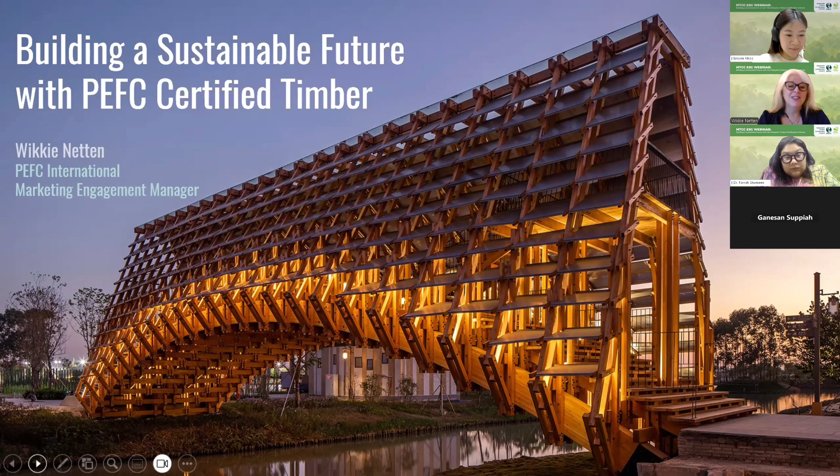Good morning, everyone. Selamat pagi. Thank you, Evelyn, for the kind introduction, and Dr. Farah, it's such a pleasure for me to be here with you today. A big thank you to my colleagues at MTCC, the wonderful organizers and my fellow speakers, and to all of you for taking time out of your busy schedule to join us. Over the next 20 minutes, I would love to take you on a little journey - a journey into how we can build a sustainable future together. That future starts at the forest, because forests and their ecosystems are the essential element for our future. Let's take a virtual tour together.

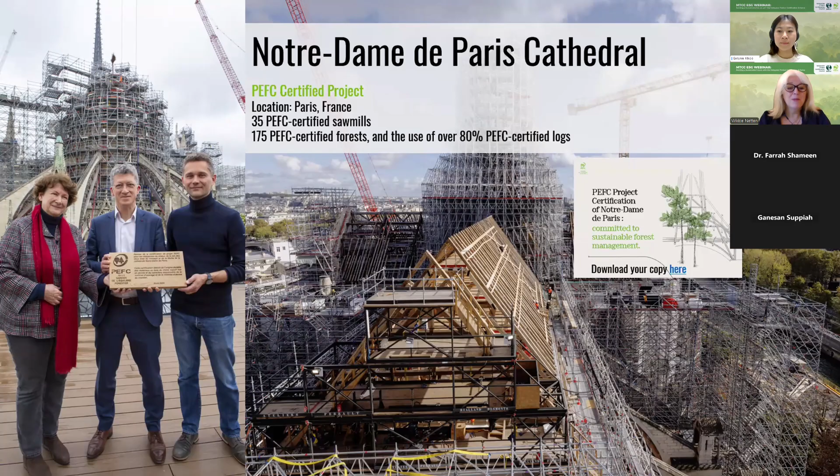The French company Chaisor went on to win the contract to supply PEFC certified wooden chairs. For Chaisor, it's unthinkable to use wood without the assurance that it comes from sustainably managed forest, and this unwavering commitment secured them the opportunity to supply 1,500 chairs for Notre Dame de Paris.

An example closer to home, we too are building a sustainable future with certified timber. A standout example is the academic building south of the Nanyang Technological University in Singapore. At the time of its completion, it was the largest mass timber building in Asia, spanning an impressive 42,000 square meters and incorporating 13,000 cubic meters of PEFC certified timber.

This project too achieved PEFC project certification, ensuring that every piece of timber was responsibly sourced. It's a shining example of how Singapore is embracing innovation and sustainable construction to reduce environmental impact while creating inspiring spaces for learning and collaboration.

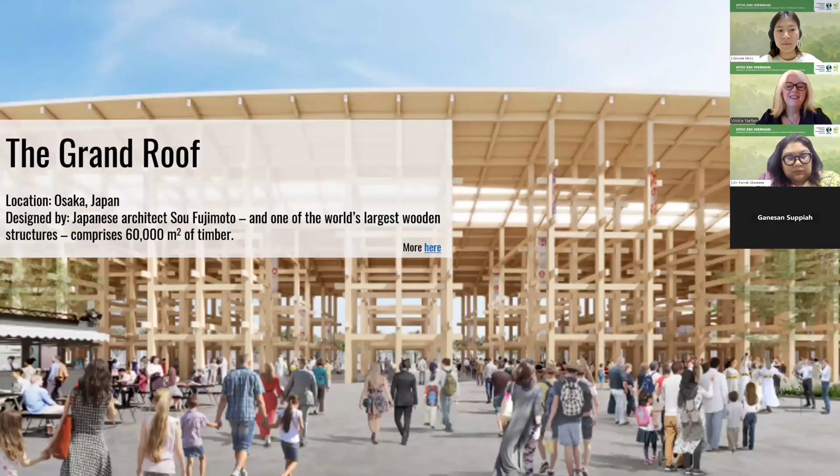But then came something even bigger. At the World Expo in Osaka, the world's largest wooden architectural structure was taking center stage. Recognized by the Guinness World Records, the Grand Roof, a circular wooden ring that houses national and thematic pavilions, demonstrates what is possible with wood.

The Grand Roof, designed by Japanese architect Sou Fujimoto, is one of the world's largest wooden structures and comprises 60,000 square meters of timber. It is built using 70% local Japanese cedar and 30% imported Scots pine. The project embodies circular design and climate-conscious construction.

Sustainability is at the heart of Expo 2025, and timber plays a starring role, not just because it's renewable, but because it enables modular construction, easy disassembly, and material reuse.

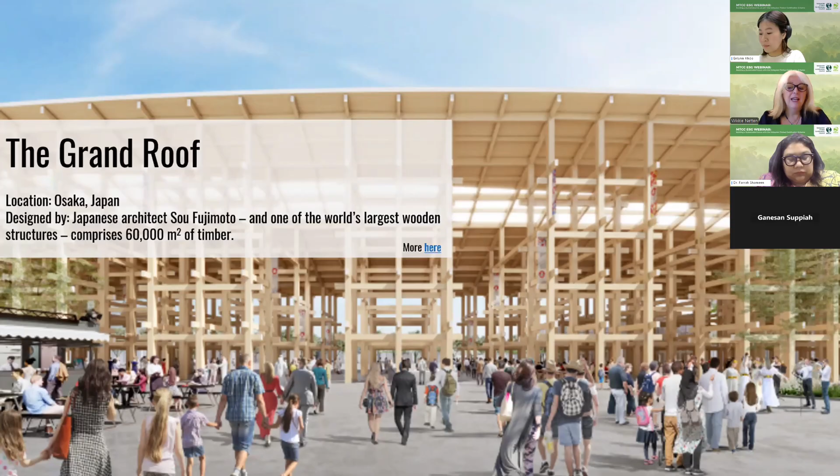Six national pavilions at Expo Osaka have chosen PEFC certified timber for the building of their pavilion, making a strong statement. These nations' commitments reflect a shared vision that sustainability isn't just about how we build, but what we build with and how we design for the future.

For structures meant to last just six months, timber offers unmatched speed, flexibility, and circularity. But when it's certified by PEFC, it carries a powerful message that environmental and social responsibility matters from forest to finished structure.

A powerful driver for sustainable construction today is the network of the Green Building Councils, or GBCs, around the world. The World Green Building Council catalyzes the uptake of sustainable and decarbonized built environments for everyone, everywhere. They work to deliver on the ambitions of the Paris Agreement and the United Nations Global Goals for Sustainable Development.

These councils are setting benchmarks for environmental responsibility in the construction sector and champion best practice to deliver on the 2030 decarbonization and sustainability goals for the construction sector.

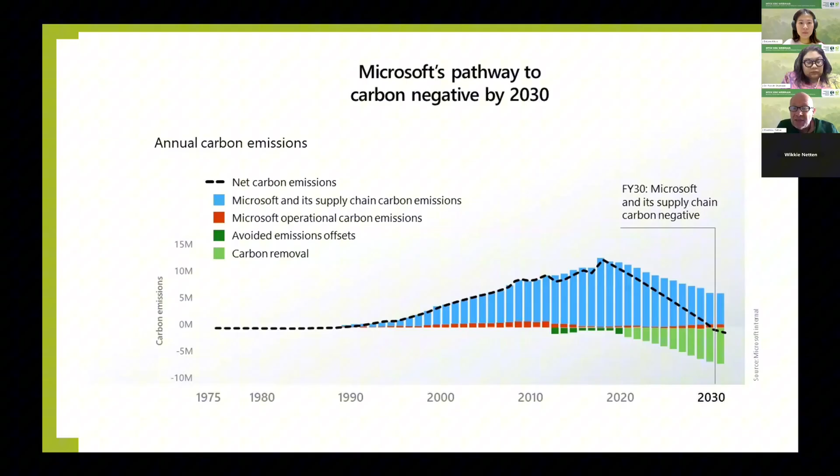This is just a little background on this: Scope 1 is your direct emissions, the fuel of the vehicles, tractors, or heavy equipment you're using in your plantation, the diesel genset in your sawmill or production plant. Scope 2 is the electricity that you're getting from TNB or other suppliers. And Scope 3 is everything else - the products you're buying, your outsourced transportation, even your products being used by your customers.

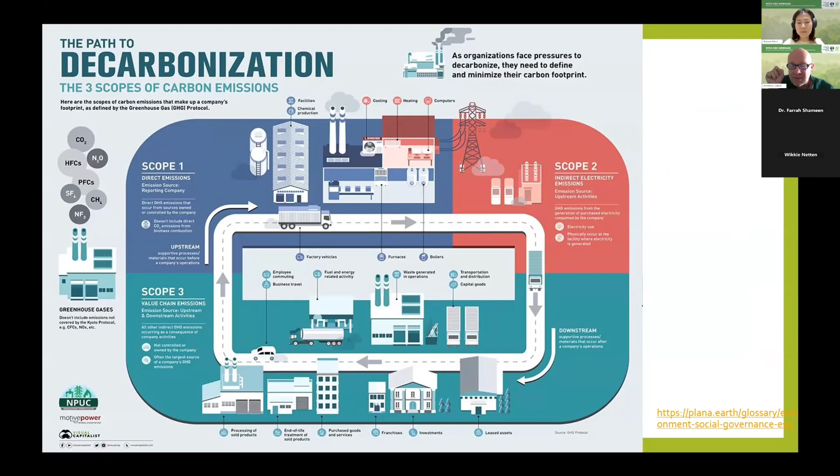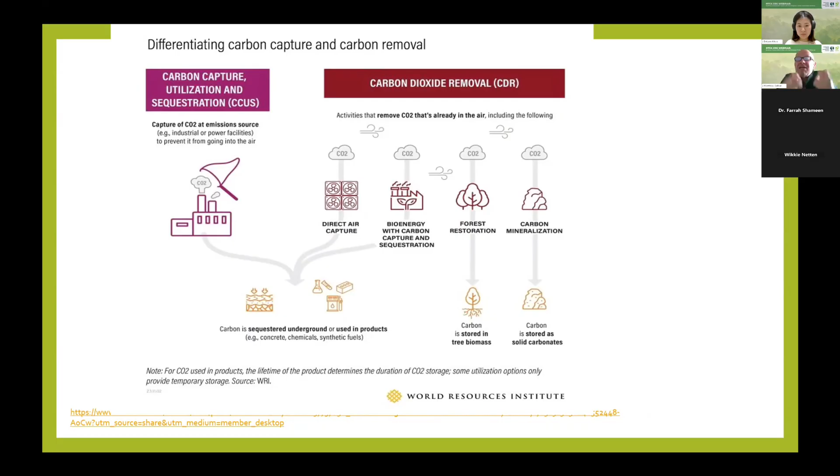And that is where we will have a gigantic business opportunity, because the carbon that is in your products is the big opportunity here. Now, carbon capture and removal - some people will do it with technology, but that's going to be very expensive. But if we do it through forest restoration, through reforestation, through plantation, we are storing the carbon in the tree as biomass. And if we then even mineralize that carbon, you might have heard of biochar. This is one of the big new mega trends here.

Now, a quiz question for you guys, and for all of those that answer this question somewhere close to reality: What is the carbon footprint of cement per ton of clinker? This is actually the big opportunity for anything made of forest-based, certified forest-based products. Can anyone here answer me that question in the chat box? If you answer close to correct, I will send you a copy of my book that I wrote 10 years ago in PDF form, The Green Man's Guide to Green Living and Working. And you will get a little goodie bag from Dr. Farah and Enlin sent to your place, or for pickup at MTCC next time you're in KL. What is the average carbon footprint of cement clinker per ton of cement? Anyone that can give it a shot and try to come up with the answer?

Okay, we have here Ariza, 6 to 8%. This is actually correct - cement is responsible for 6 to 8% of the world's CO2 emissions. And I think Richard here and Wong Kar Wei, yeah, I think you guys are now starting to ask ChatGPT, right? Yes, the global CO2 emissions is 8%, and the average CO2 emission per ton of cement - so maybe Enlin, you can have all of these people there get my booklet. And actually, the best correct answer that was given very fast was from Wong Kar Wei: 1 ton of cement clinker is about 0.8 tons of carbon dioxide equivalent.

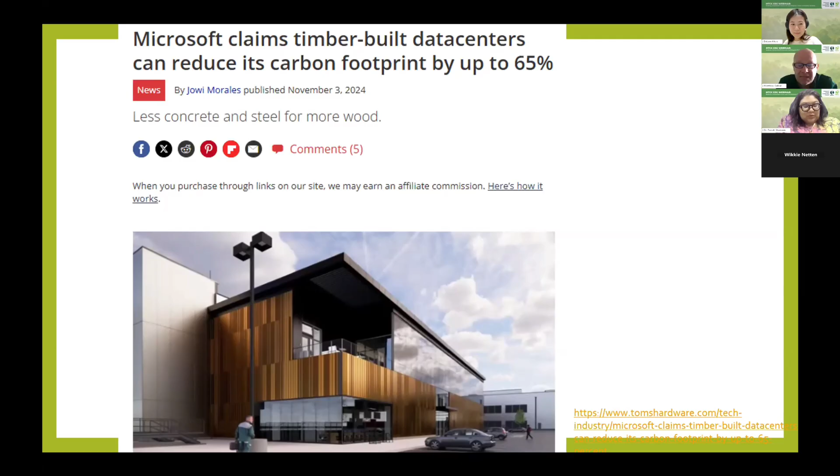And they are purchasing carbon removal credits from bio-based materials already, big time. This company here is from South America - you look at the video, they have forestry chain of custody and certification to the national standard in their country in South America. So they are using the MTCC equivalent framework to show the quality and the reliability and the credibility of the raw material that they are sourcing.

We can send you the video, but when you see that, you see this is exactly what MTCC and PEFC stand for, the credibility of your raw material. Even Google is buying into this type of carbon removal credits.

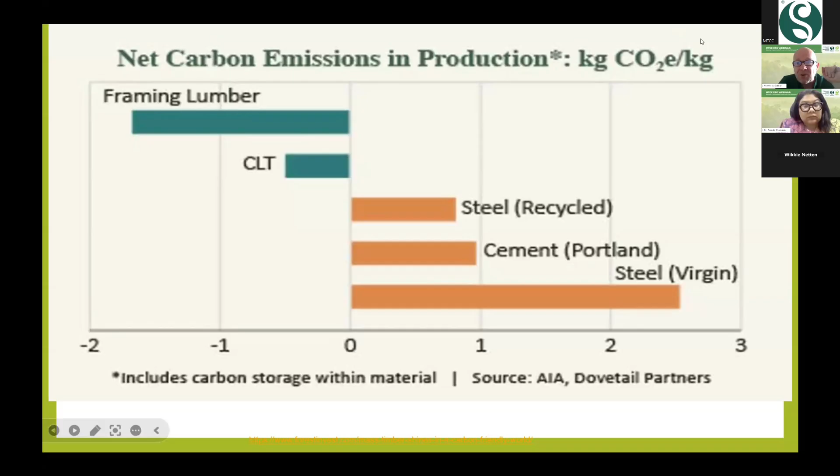Here are some environmental product declarations for sawn timber, finger jointed, CLT rib panels. You see, if you have structural sawn timber or finger joints, your carbon footprint is super low, negative global warming potential, because you don't have a lot of production carbon footprint. But here for CLT, GLT, you still have a kind of negative carbon footprint, so glulam as well, from the Rubner group down there. So this is the big opportunity.

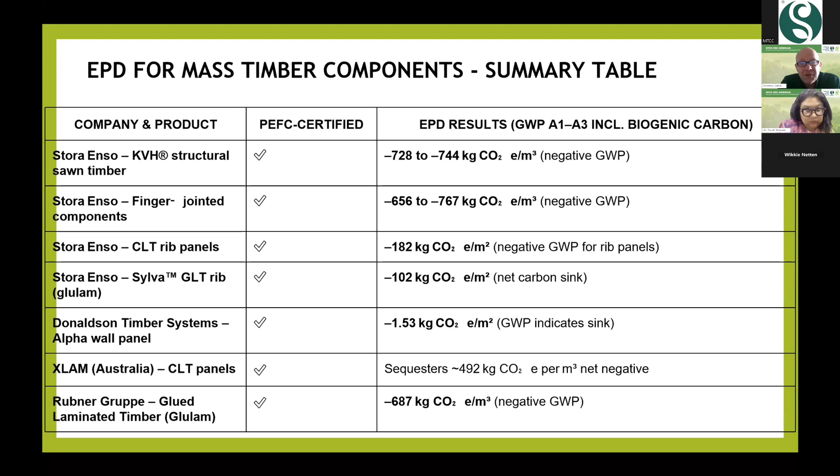That's the other beauty of some of these developments - they're even helping their packaging suppliers financially with investment into new machinery. And usually you get a longer term contract if you're focusing on decarbonization with your big customer.

Here's another example, Estrella Damm, a Spanish drinks company. They've switched to PEFC certified natural and renewable fiber, both to protect against reputational issues and to decarbonize their packaging even more.

So what can we do in terms of net zero in our industry? We can try to make our operations lower carbon. We can focus on climate positive land use - that's when we absorb more CO2 through our trees and biodiversity of land use. We can focus on circularity.

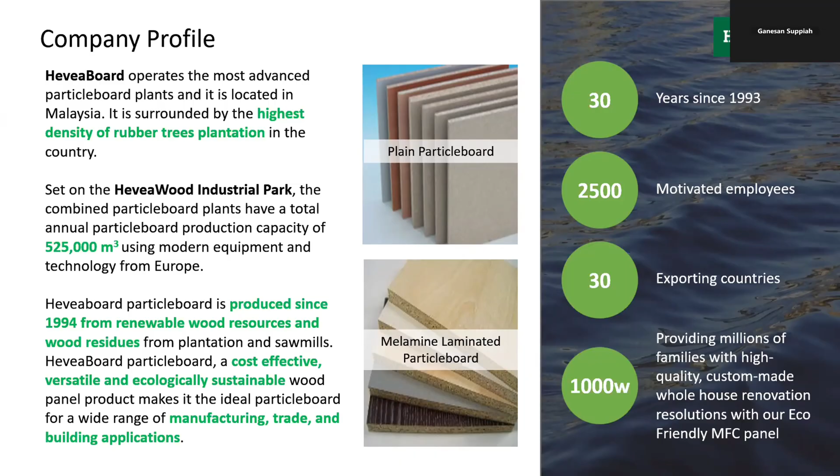Okay, next. From the onset, as we realized the supply of our raw materials was becoming more difficult to source, we decided we should look into other sustainability initiatives. As the Oxford Dictionary defines sustainability as the avoidance of the depletion of natural resources in order to maintain an ecological balance.

In line with that, we decided to start off by sourcing raw materials from sustainable forest and legal sources. So it made sense that we should work towards getting our PEFC certification. In 2012, we started working on our chain of custody, and in 2013, with support from MTIB and MTCC, we concluded the certification and obtained our certificate. This certificate helped reinforce HeveaBoard's sustainability commitments, as well as giving us commercial advantage by using the PEFC logo on products. It became the preferred choice of many of our responsible consumers, mainly overseas.

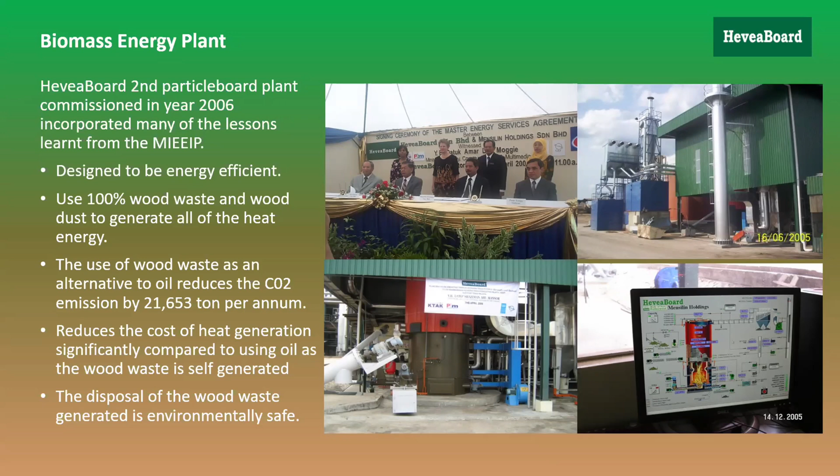Basically, with lessons learned from our first factory, built in 1994, in 2006 we extended our factory capacity to about 4 times the capacity of the first plant. We incorporated a lot of the technologies learned through these projects, converting our energy source for heating to 100% wood waste generated through the process, with no use of fossil fuels. This has given us savings of about 21,000 tons of carbon reduction. The cost of energy generation is tremendously reduced since we're using waste wood, and the cost of disposal of the wood waste generated has also been reduced.

Just some pictures of our energy plants, which we have in Gemas.

From MTCC, to generate 1 kilowatt hour of electricity releases about 0.774 kg of carbon in Peninsular Malaysia. In Sarawak, the figure is slightly less, mainly because the electricity is generated using hydropower. So in Peninsular, this is the figure.

The objective of having an organized system like ISO 50001 is that we have to develop a policy for more efficient use of energy. One of the objectives was that every year we should reduce our energy usage by about 2%. That's where we set our fixed targets to meet the policy. We receive data from various parts of the plant, which we use to analyze and decide the most efficient way to use energy. We have a continuous improvement program in place.

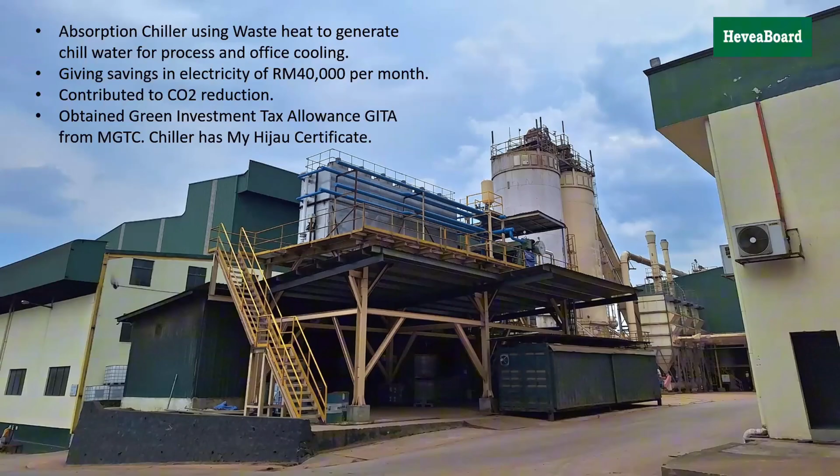Some of the projects, apart from reduction in electricity, there are also a lot of opportunities within our plant where we have a lot of waste heat being generated. This waste heat is being exhausted through our chimneys, and we decided to install what we call an absorption chiller. This absorption chiller recovers the waste heat from our stack and generates chilled water for process and office cooling. It has also given us a reduction in electricity, which directly contributed to the reduction of CO2 generation. This obtained a green investment tax allowance from the MGTC because the chiller has a My Hijau certificate.

We have also installed solar panels. This is our employees' car park that has got solar panels with about 447 kilowatt peak power. Solar generation contributes to the reduction of electricity generated using TNB electricity, thus there is a contribution in CO2 reduction. Next, we also have solar roof panels on our factory rooftop, giving us about 880 kilowatt.

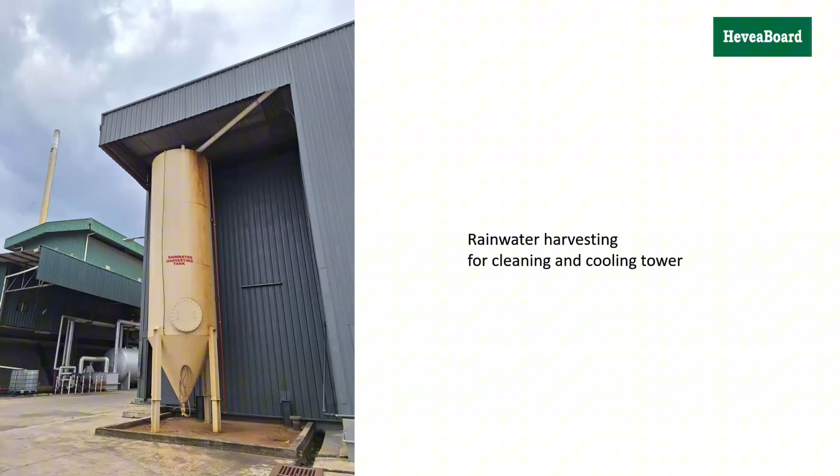Other sustainability measures that we are looking at is water management. Our process does require water management, and with the installation of the absorption chiller, some cooling water is necessary. So we have embarked on a system. This is just one example of how we harvest the rainwater, which is then used for our cooling towers. So practically, we do not consume any water from the local supply. We totally use water recovered from the rainwater. We also have some deep wells, some groundwater, which we are also in the process of working on.

Of course, all these things will not be successful if we don't have the raw materials to run the operations. So the biggest challenge which we have been facing over the last 10 years is the reduction of the raw material supply. We have found that the amount of wood currently available is starting to reduce. Furthermore, other new factories and industries have also set up nearby, so the competition for material has become intense. We have to be very innovative in how we obtain or maximize the wood available within this region. We have made a lot of massive advances in this area.

I'll share with you a few examples of what we have done.

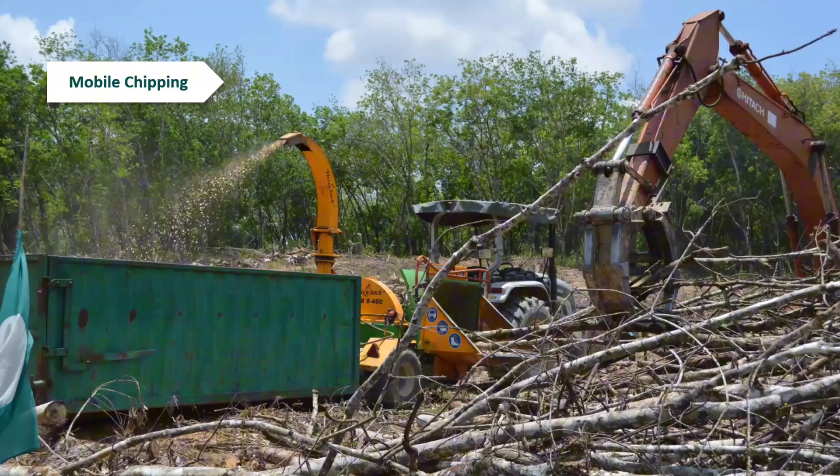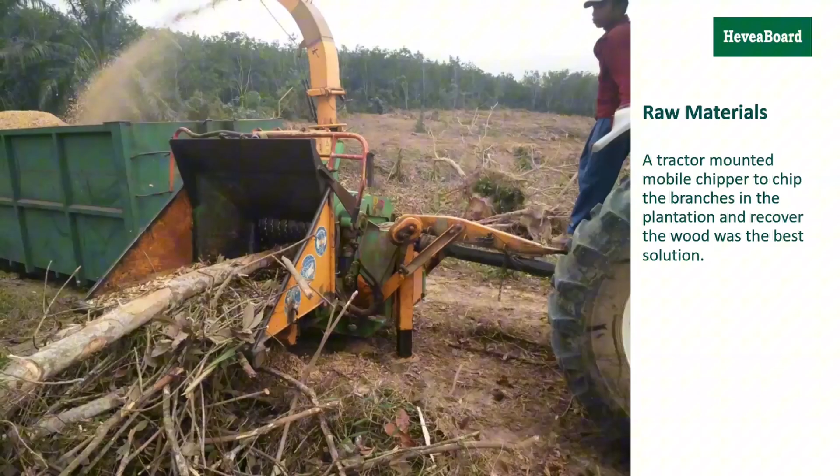Here, what you see is what we call mobile chipping. These small branches which you see are normally left in the field and not usable by anybody, so the most common method of disposal has been open burning. Through this mobile chipping, we are able to chip the materials, the small branches, into a ro-ro truck, which is then transported to our factory.

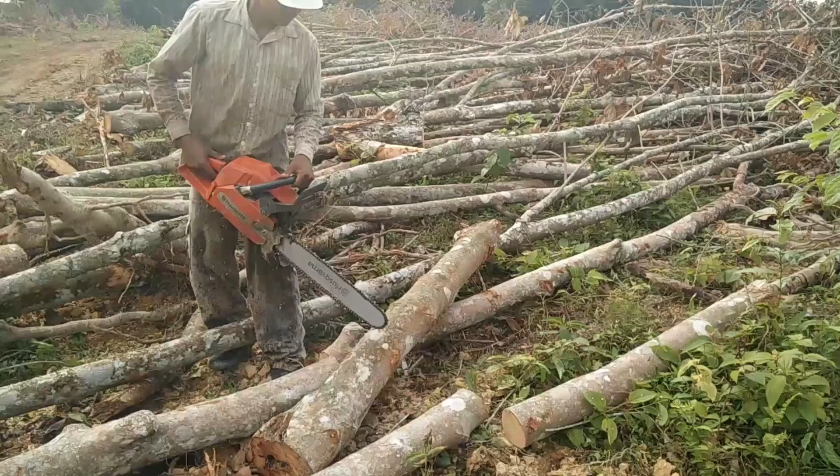Here we have a video. I'll show you a video of what we are doing.

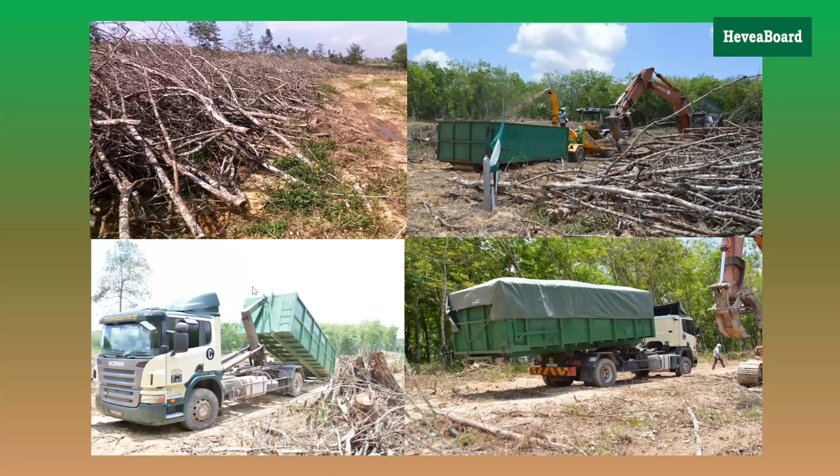So we are able to recover all this material, these small branches, that otherwise would have been left to burn in the field.

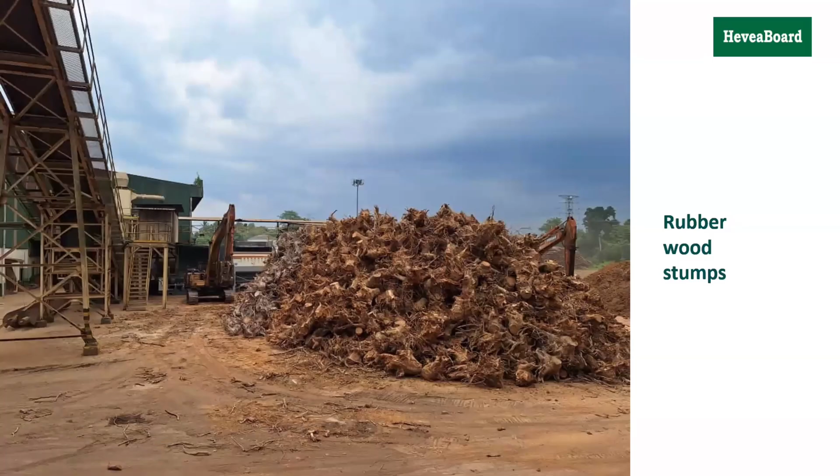Another source of material which is also left in the wood and very difficult to process is the wood stumps, basically the roots. This is a real challenge to process, because the roots are very difficult, they entangle in the machines, and they contain a lot of sand and stones. However, it is a very good source of material that is being left to waste, so we use this material.

We'll show you a video of how we are able to process this material.

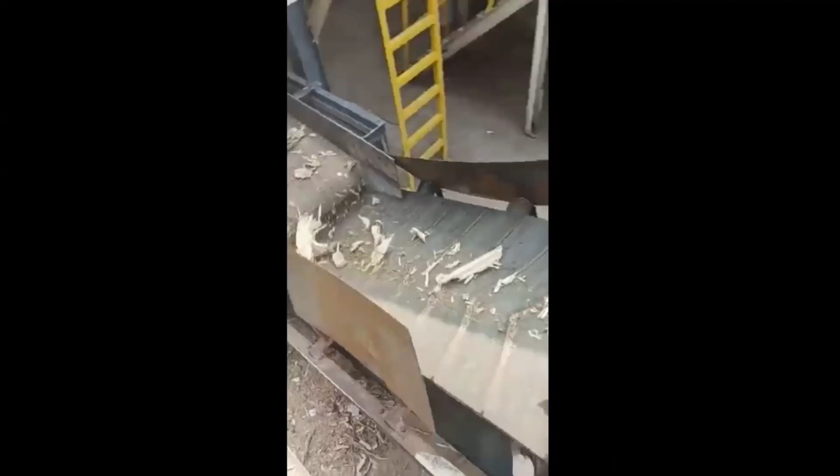I hope the video was clear. So what you can see is, previously, in a typical plantation, the most amount of wood we can recover is about 70%. The other 30%, which is the stumps as well as small branches, is normally left behind in the plantation through other means of disposal. With our system, we are able to increase recovery by another 20%. What is left behind is mostly small branches and leaves which act as compost. The plantation is cleared very fast and ready for replanting. We do not leave any waste behind for disposal, no pollution or damage to air quality, no distress to animals or wildlife. There's also additional income for plantation owners or smallholders who are able to sell this waste wood to companies like HeveaBoard.

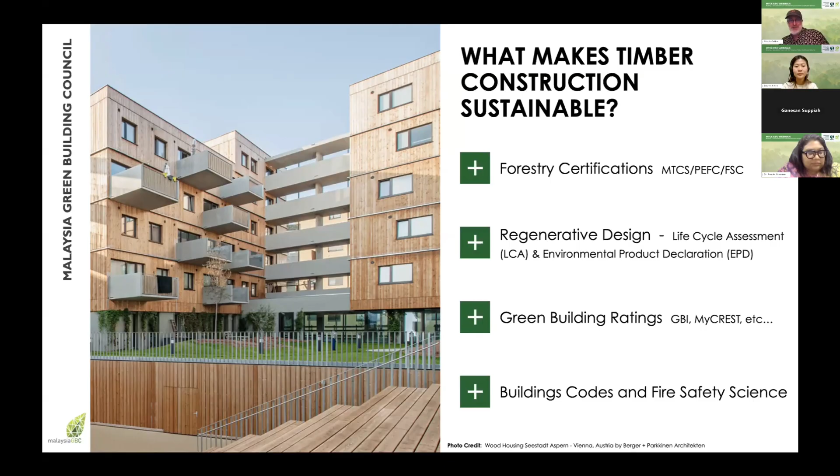So Matthias touched on timber as a carbon mitigating construction material. The Malaysia Green Building Council has an annual assessment for carbon emissions from buildings in Malaysia called Carbon Score. And so I'm going to use the Carbon Score framework to expand a little bit on what Matthias spoke about earlier about timber as a low carbon construction material.

So the CarbonScore framework provides an annual assessment of what are the carbon emissions for a building for one year. The framework looks at both operational and embodied CO2.

The CarbonScore assessment looks at this 80% from energy. It also looks at embodied carbon from the construction material, the original construction materials, as well as incremental operational emissions from water and waste. Typically for the average Malaysian building, about 1 to 2% at most of our carbon emissions come from water used by the building and waste generated from the building.

So the overwhelming majority of life cycle emissions from buildings in Malaysia come from operational energy use and the carbon emissions embodied in the original construction for that building. And that tallies more or less with global examples. In countries that have cleaner grids, Denmark for example, their electricity generation is about 6 times cleaner than Malaysia's. China's is about 40% cleaner than Malaysia's. Indonesia and some of our regional partners, Singapore, Malaysia, Indonesia, our grid emissions factor is all about equivalent.

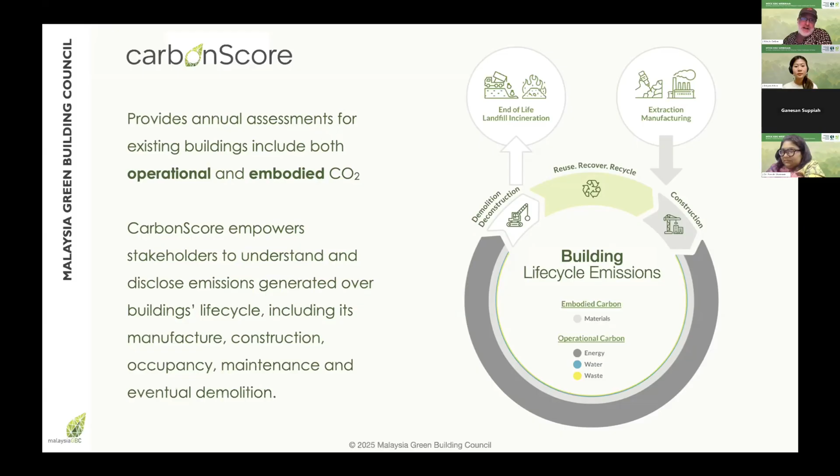Timber only has a 0 carbon or negative carbon factor on construction if it's harvested from a managed forest. Timber that's taken from a primary forest, and especially in Malaysia this is true, is a net emitter of carbon, and a substantial one, because our Malaysian forests themselves have carbon sequestration. So timber that's harvested unsustainably is a very, very powerful emitter of CO2. It's only when timber products are extracted from managed forestry that we enjoy the benefits of timber as a 0 carbon or negative carbon material.

So I mentioned earlier green building certification. This is one case study of a building, the Sarawak Museum in Kuching, that's achieved credit towards its GBI certification. This project used more than 92% of the total wood-based materials in the building certified under MTCS.

And this is true not just of GBI, but of all green building ratings, both within Malaysia and internationally, that the use of certified timber is recognized as contributing to the green building certification. This is a really powerful tool in terms of awareness for sustainable construction, and for timber specifically.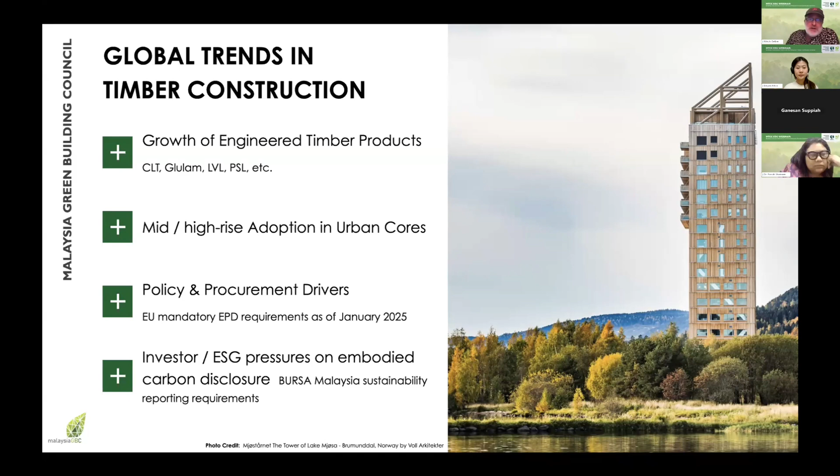So Matthias touched on EPDs before. How timber can leverage this is that an environmental product declaration is a public disclosure of the environmental impact of a construction material.

Think of it like when you go to the supermarket, you have the nutrient label that shows you exactly what's in the food product you're purchasing - the fat content, sodium, sugars, etc. What an EPD is, is a health label for the public, for your construction material or any product whatsoever. On the bottom left of the screen we have an example - this is a concrete product. This is the environmental impact of 1 meter cube of concrete that is affixed to that concrete and gives public disclosure for the purchaser of what the environmental impact of that material is.

So the graph on the right is the uptake of EPDs globally, and you'll notice that this progression is not linear - it's exponential. This chart ends in 2022. As of 2024, we have upwards of 40,000 EPDs globally for construction materials. So year on year, the number of EPDs in the market is doubling, increasing exponentially.

So we'll quickly take a look at a few case studies in a little more detail. I studied architecture in Vancouver, British Columbia. British Columbia has a massive softwood timber industry - it's the second biggest economic driver of their province in Canada. This is an 18-story student residence at the University of British Columbia. When it was completed, it was the tallest hybrid mass timber building in the world. It's proof of concept that mass timber construction can be safe, fast, and cost competitive.

Matthias mentioned before the efficiencies of working with modular timber construction. This building's superstructure was completed in just over 2 months by a construction crew of just 9 people. It shows - and we'll see the next presentation about the Lego construction - the speed, the efficiency, the modularity, the lightweight aspect of timber all contributes to lower cost. Concrete is not only a high-emitting material, it's a heavy material. It requires extensive costs for transportation, fabrication, and huge amounts of energy in the manufacturing process. Timber competes already in 2025, one-to-one in terms of cost, for mass structural systems and construction.

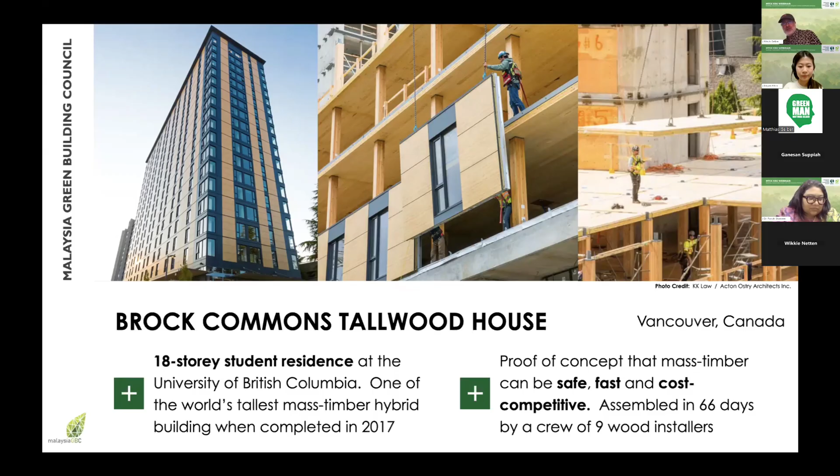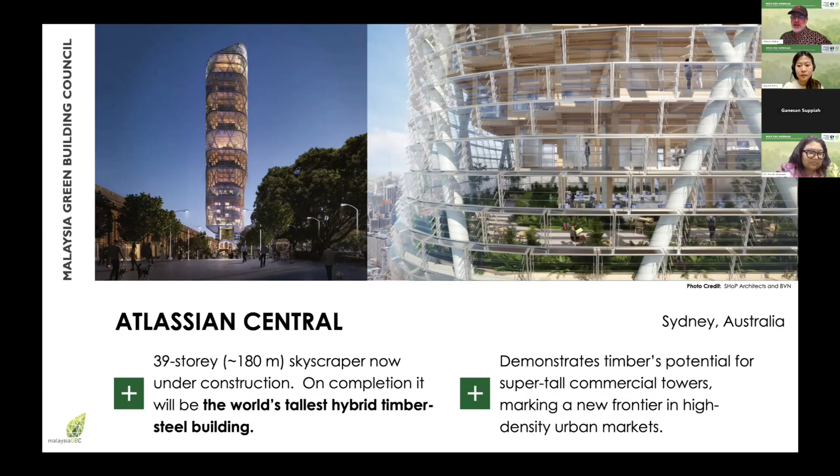Another example from Sydney is the Atlassian Central, near their Sydney Central Rail Station. It's a 39-story commercial skyscraper scheduled to be completed later this year, and on completion it'll be the world's tallest hybrid timber-steel building. It demonstrates timber's potential for super tall commercial buildings. This building has a steel exoskeleton around the outside, and you can see from the rendering on the top right, the core, the floor slabs, the partitions, and the internal structure are all mass timber construction.

The last case study is Port Plus in Yokohama, Japan - an 11-story mixed-use, full mass timber structure. When it was built in 2022, it was the tallest full mass timber structure in the world, using prefabricated cross-laminated timber panels and glulam structure. The reason I showed this one is not only because of its beauty, but it shows timber's viability as a structural system in a really complicated seismic and coastal context. Yokohama is right on the ocean, sits along the Ring of Fire, and is prone to earthquakes and seismic construction.

So this building relates to what we mentioned before about fire requirements and some misconceptions. I'll circle back using this building as a case study. There's a real misperception when it comes to mass timber and fire, because people think of wood as being combustible. When we look at fire code - and this is true not only for Malaysian standards but fire codes around the world - buildings have a fire rating measured in hours: 1 hour rated, 2 hour rated, 4 hour rated. These fire ratings indicate how long the building will remain standing if a fire breaks out - how long the material will take before the fire compromises its structural integrity.

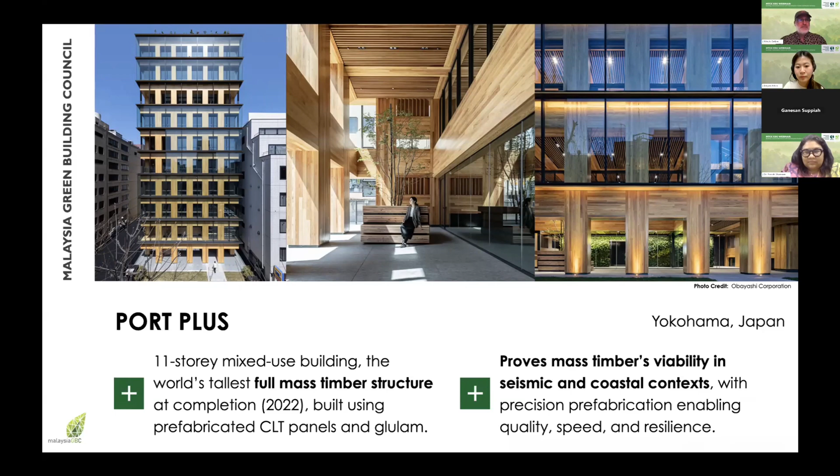So I'll move quickly for the sake of time. What are some key design considerations for use of mass timber in the tropics? I already talked about fire. Acoustics is another one, because we're used to working with concrete, and timber has different acoustic properties. So the acoustic performance of the building needs to be accounted for when working with timber structure.

There was a question in the chat earlier about termites. Mass timber is an industrial product, controlled at a factory output. So termites can be handled through processes, filtration, etc., just like steel and just like concrete. Timber is optimized at the factory to deal with these environmental challenges.

In addition, we talked about the importance of certification. This is especially true in Malaysia, to be legally sourced and sustainably managed. The environmental impact from timber is only gained with sustainably managed forests.

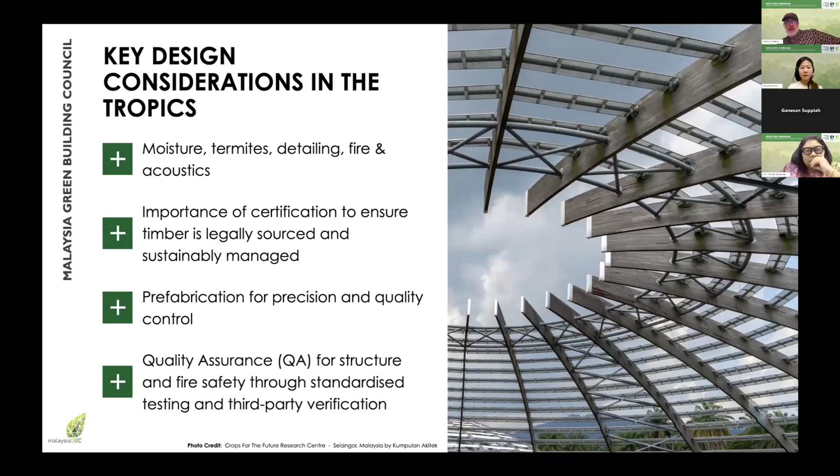And then finally, looking at procurement, which is critical. Government endorsement, architects, engineers need to be equipped with the skill to adopt this design.

And finally, market development solutions. Increasingly in Malaysia, we're seeing the adoption of green financing, green bonds, and mass timber is a very elegant, straight line towards preferable loans for construction and green financing.

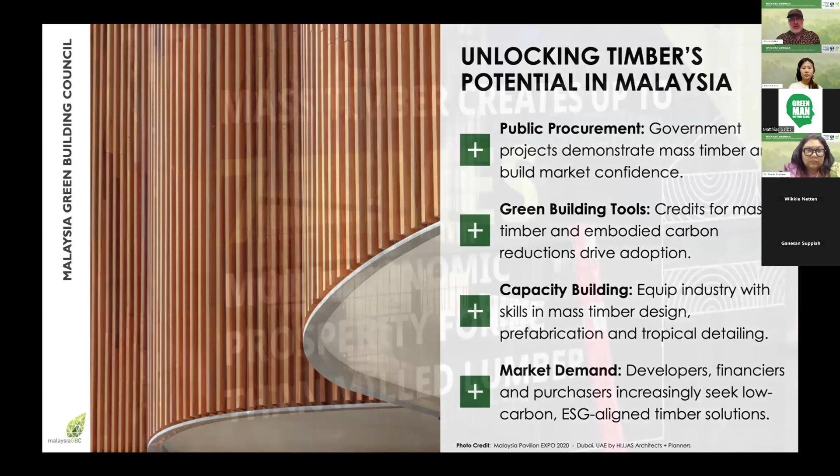So we'll end with this: I just came back from a trip to Vancouver a few months ago. These photos are a little hard to read, but these are images I took from construction hoarding at a 12-story timber building going up across the street from where I was staying. Mass timber creates up to 7 times more value than milled lumber.

This is because, first and foremost, mass timber is a value-add product. It adds value along the value chain, not just in the end building, but through the manufacturing process. It takes a raw material and adds value so it can substitute out much more expensive and costly steel and concrete construction.

And the building going up across the street—BC forest regrew the wood that made the building in less than 60 minutes. This was a 12-story building with 200 residential apartments, and the forestry regenerated that raw material in less than an hour.

So the key takeaways: mass timber is proven and scalable worldwide as a low carbon building solution. Certification and environmental disclosures are key drivers to ensure compliance in international markets. And Malaysia has a tremendous opportunity to catalyze growth.

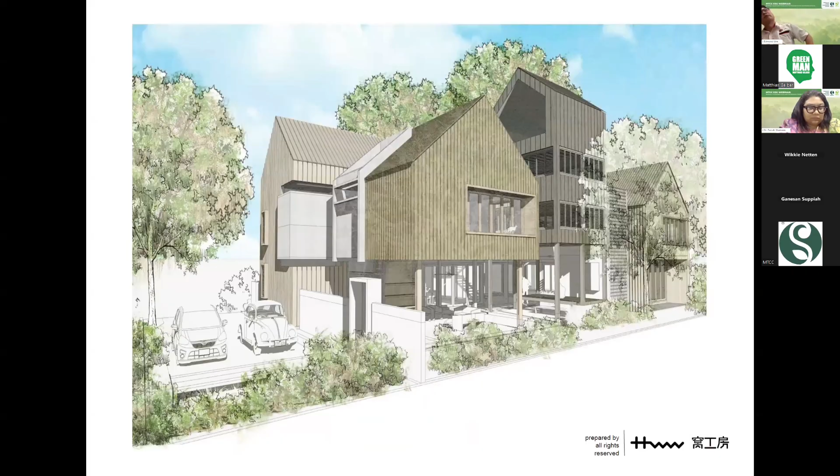The site is located nearby a former tin mine lake, so we have a natural environment here with a water body not far away.

The planning of the house is such that we try to create a very open space at the ground floor. We have all the common and semi-public areas located at the ground floor, and all the bedrooms at the first floor. This enables us to plan the house in a more naturally ventilated manner, while the bedrooms have more privacy and more enclosed walls.

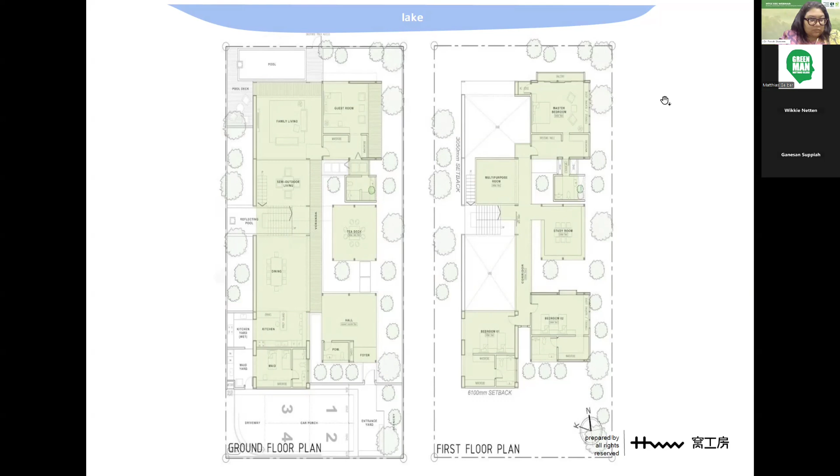So a quick diagram of the house shows how we place the elongated house with open area at the ground floor and more enclosed rooms at the first floor.

The lake is at the back or front of the house, depending on how you see it, and we actually draw cool air from the lake. So having a lower ground that is open air is very essential.

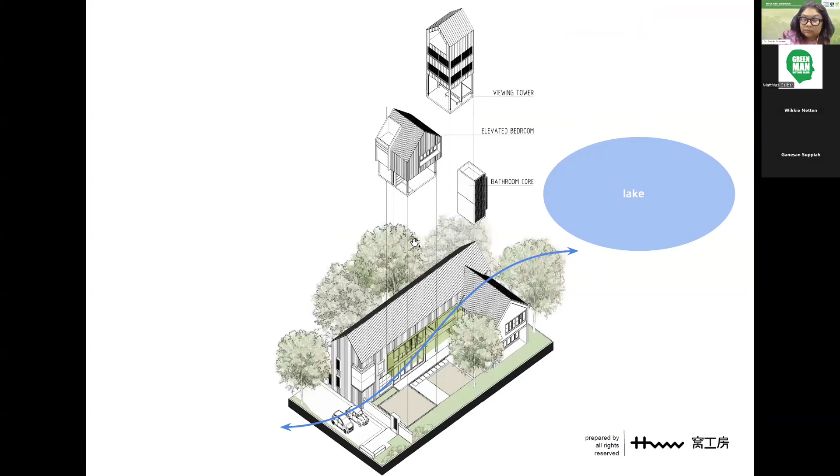These are cut-out sections of the house showing how we apply double volume spaces within important areas such as the living hall and dining hall, and also how we use the staircase.

The house is in various clusters. The use of clustering is important, where we can plan micro public spaces within the neighborhood, growing up in Terengganu, which is a very village setting. So that makes our design rather easy and casual, which I will explain through some of the photos later.

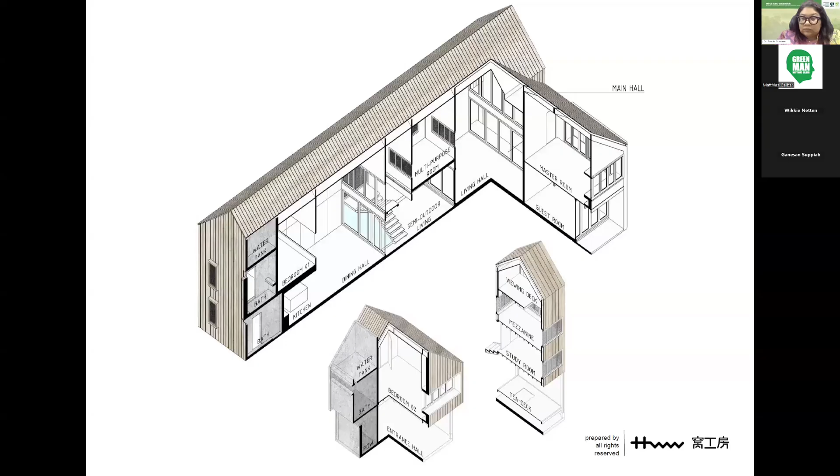This is a diagram of how the glulam timber structure is incorporated with some minor concrete cores. We use concrete core as an anchoring structure to strengthen the timber structure, and at the same time it's used for all the wet areas such as toilet, WC, bathroom, and water tank areas. So the use of concrete is in a very controlled manner, where you can see most of it consists of glulam timber.

So these are some general details for the glulam structures.

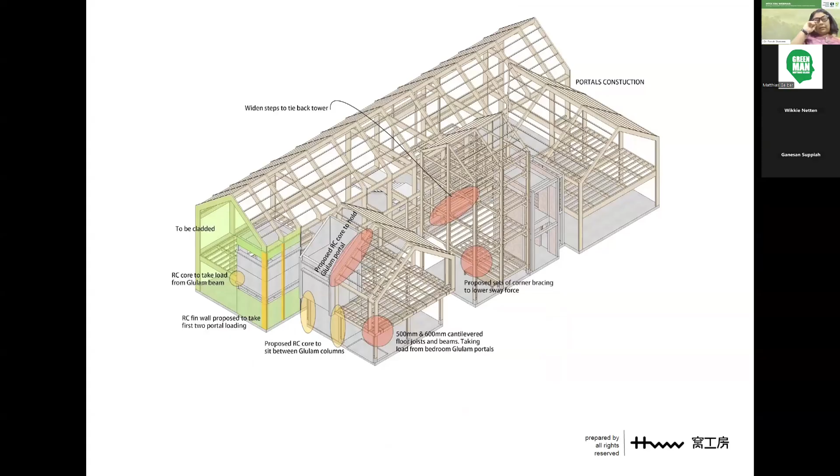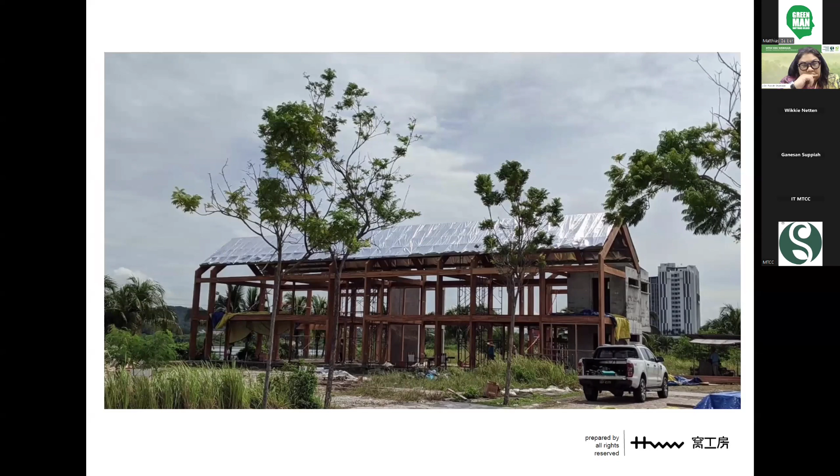I will also quickly show some photos during the assembly. Maybe Edmund, you can share with us how long it takes to assemble the main glulam structure? For this row of structure, we have 9 portals. It took about 2 days on site for us to connect them together, and once we have all the connections done, I think it takes about 3 to 4 days to complete.

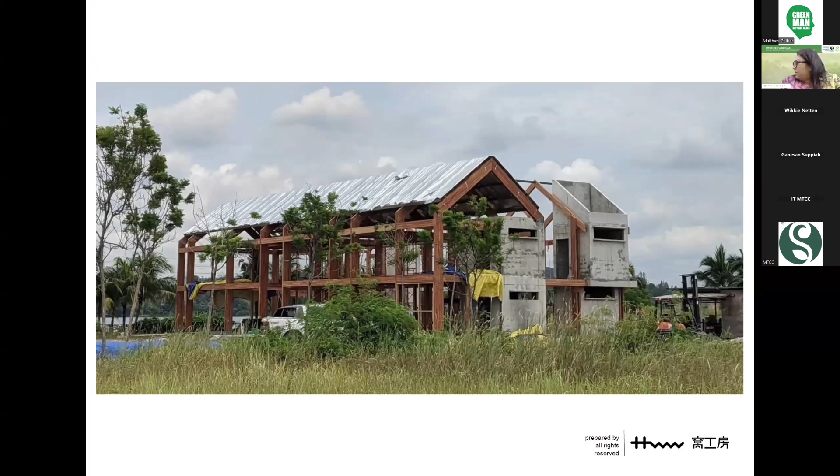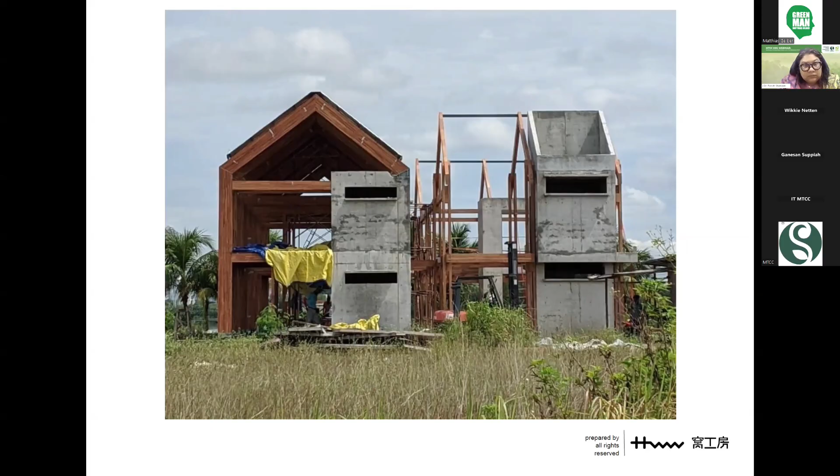The first, the big building on the left side - and for other smaller ones, it takes about 2 to 3 days. So it's a very simple IBS way, very Lego-like design. Everything can be done on site within a few days if you get it planned properly.

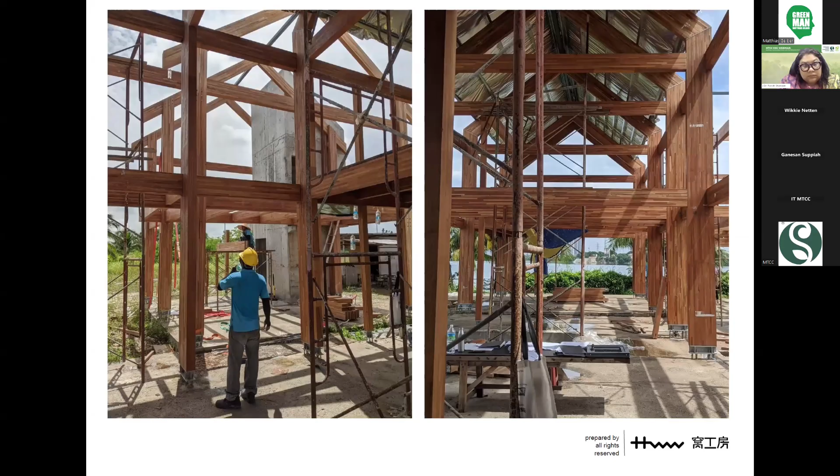As you can see, some with double column, some with single column. We try to come up with different designs and get a feel of it. So far we are quite confident that timber can be used as a structure, and it can replace steel structure as well.

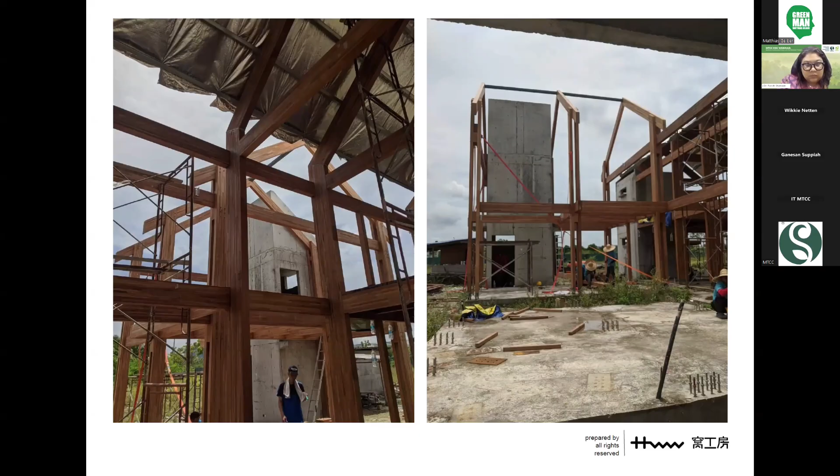And these are some of the hidden joints that we use. As you can see, the steel plates are mostly hidden inside the wood, and at the base we kind of expose it so we can at least see whether there's any termite attack, and it's easier for us to maintain in the future.

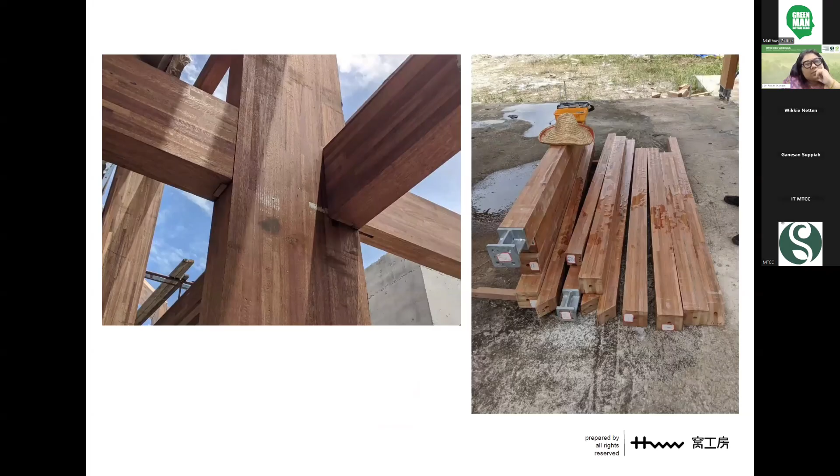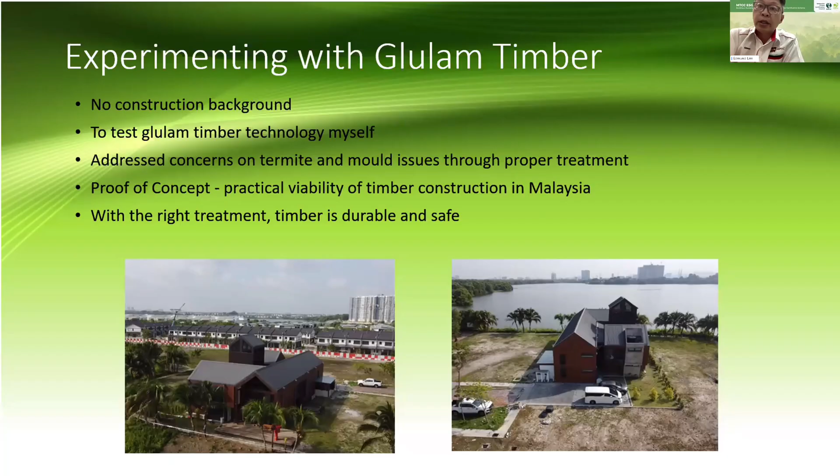And this proves that timber can be a real alternative in Malaysia. As you can see here, the front and back view of the house. We are also very concerned about termite and mold issues, that's why the timber we use in this house is all treated, 100% treated. So far in the last 5 years, we don't see any issue with termites. We'd like to prove the concept that timber construction can be used in Malaysia, and with the right treatment, we believe timber can be safe and durable. Next.

So in this project, we use 100% certified timber. Some are recovery timber from my production, and some are timbers that we buy from Terengganu concessions, a PEFC certified concession. We believe that we store about 100 tons of carbon in the house, and we try to showcase that we can reduce our reliance on cement and steel.

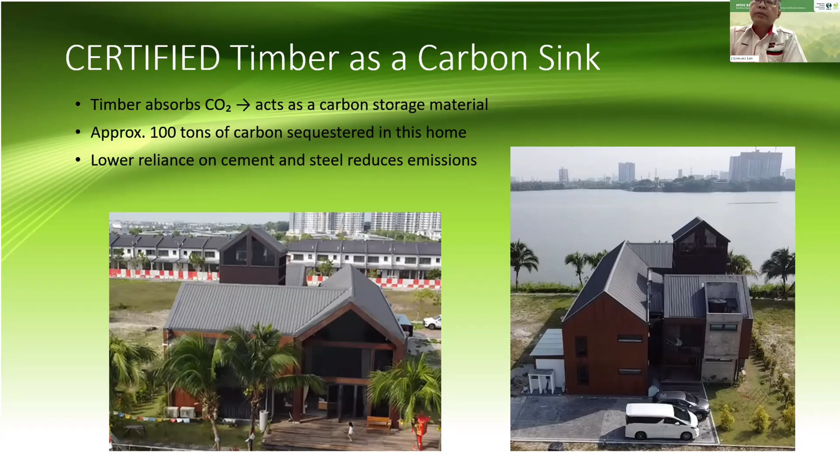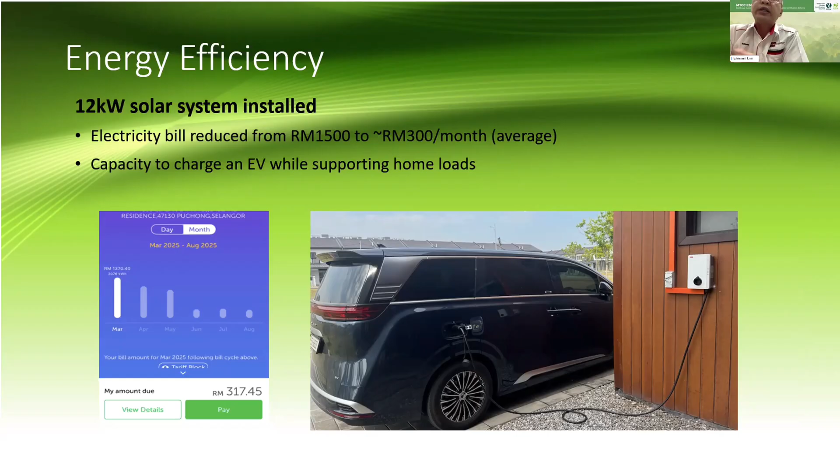We also designed the house with ponds and a rainwater harvesting system so we can water the plants and trees. The lake has plenty of water, and if I needed water from the lake I should be able to get it, but I couldn't do it now because it belongs to Air Selangor, so I can't access the lake because it's illegal to do so.

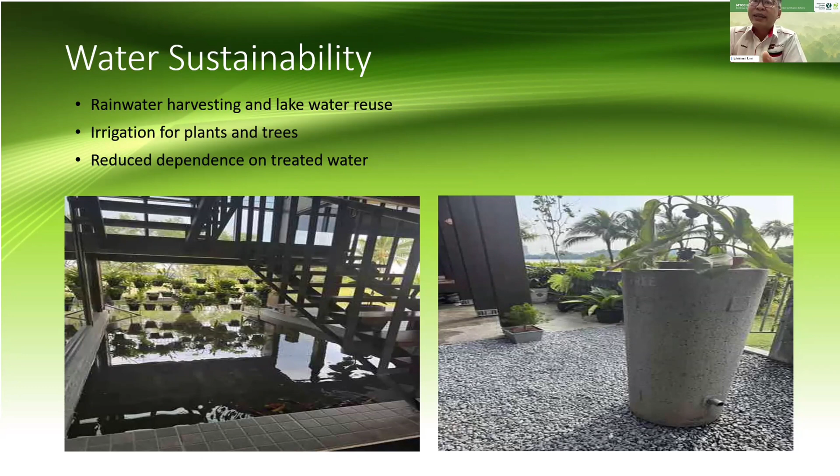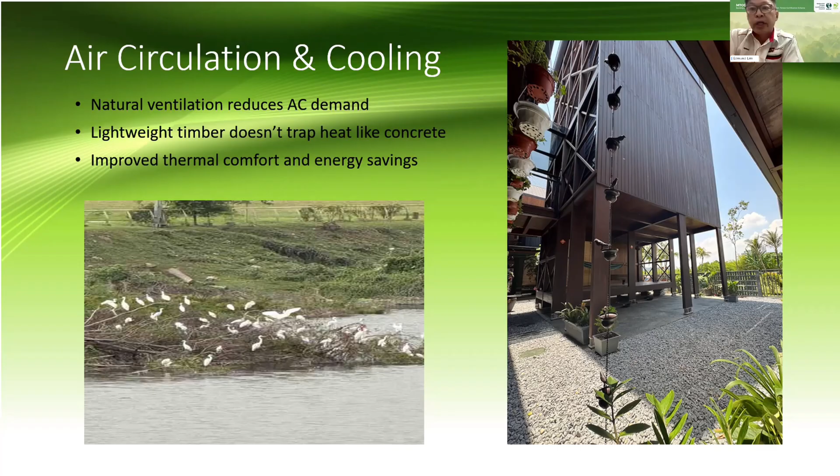As you can see, this is a very open design. I like to express that it's Terengganu Pavilion style elements, and also similar to the Chinese Siheyuan courtyard style, about good airflow, natural light, and living closer to nature. Those birds come to my house at the end of the year. I believe they come from the north, maybe Vietnam or Thailand. When they come here, they stay for about a month or so, then go back to wherever they came from.

Climate change is real. I think the world is getting hotter, and there's no question about that. My home alone locks away around 100 tons of carbon, so imagine if more of our buildings did the same, we could really change the future for our kids.

The challenges and key learnings from this project are that it's quite difficult to promote at the beginning, because a lot of people don't know about glulam. They have no idea about mass timber construction in Malaysia. In the past few years we've been meeting architects and developers to tell them about glulam, and we've found that most people have issues about fire. They worry about fire issues, termite issues, and mold issues.

These are the things we are going to solve, especially on the fire side, together with MTC, and more R&D will take place. In terms of termites, we believe we have the solution for Malaysian weather, and the mold issue can also be solved. At this current moment, we think certified timber products should be promoted by authorities, especially CIDB and GBI.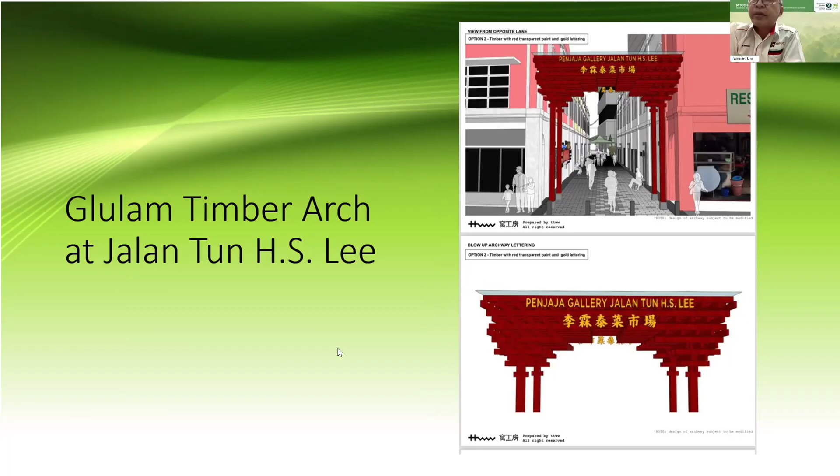I think, Edmund, if you don't mind, I'll jump in to answer the question about solar quickly. Yes, please, yes, okay sure.

So there's a question in the chat from Tracy about the end-of-life challenges with solar panels. It's a really good question. There's two main comments associated with solar energy: one is the end-of-life use of the panel when it reaches the end of life after 25, 30 years, and the other is land use.

End of life, I should start by saying there's no human activity that has zero environmental impact. All human activity has some environmental impact whatsoever. It's a common misperception that when a solution is sustainable or green, it has to be perfect or immaculate. Solar panels are a great example because the comparison is not to zero, it's to what the existing business-as-usual energy technologies are and have been. So if you compare solar panels to coal, gas, fossil fuels, the environmental impact from the panel is an order of magnitude smaller than fossil fuel emissions, extraction, etc.